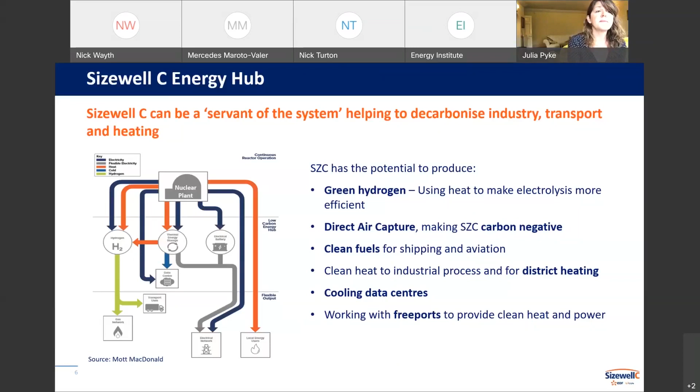We are looking at making hydrogen in the first instance from Sizewell B, and we're going to make that hydrogen for our own use to power hydrogen-powered buses, and as more and more hydrogen-powered construction plant becomes available, that construction plant, so not only lowering the carbon of construction, but also obviously reducing particulate emissions.

But because we're doing that, we are talking to other people in the area around working together so that we can start marrying up greater hydrogen production to the increasing demand profile. So we're talking to local businesses, we're talking to the local councils, and I'll come on to an example about how we're working as part of Freeport East and looking at how to work with the ports to enable the ports to use hydrogen-powered port vehicles, but also starting to look at clean maritime fuel.

And I think the power of a big project which is going to come into an area with a lot of infrastructure being built, when we are looking at installing our own refueling infrastructure, we can work with other people to install refueling infrastructure for more of Suffolk. And we can exercise the power of collective purchasing.

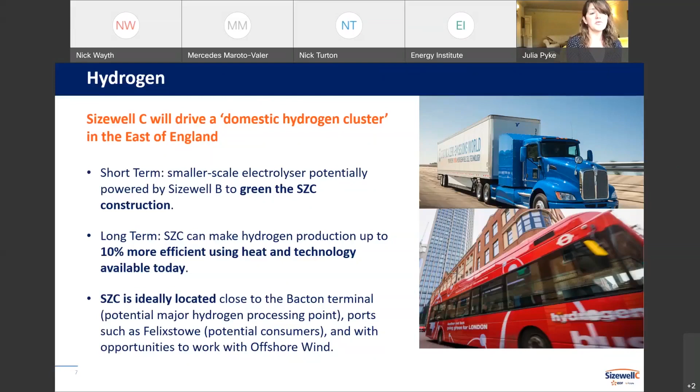So can we go on to my next slide, please?

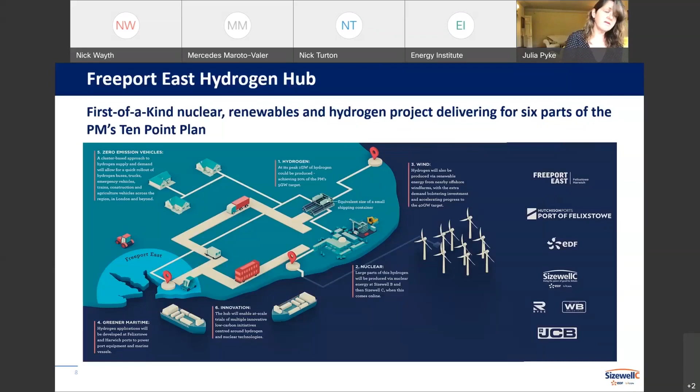So if we can go on to my next slide please, which is direct air capture. We have a great opportunity to make the power station actually carbon negative.

Direct air capture at the moment is a technology which is developing, and we are working with the University of Nottingham, Strata, and Doosan Babcock to develop a technology which, rather than being powered by electricity, would be powered by heat. Remember, the heat from Sizewell C, if we extract 400 megawatt thermal, has minimal impact on electrical output, so the heat is cheap. Using this heat rather than electricity can very significantly lower the cost of direct air capture. So we applied in consortium for funding from the BEIS competition for greenhouse gas removal technologies, and it's a really exciting opportunity to develop.

If we are able to develop a third UK EPR project, this is something which we would look to do at greater scale, and possibly optimize the balance between heat extraction and electricity even further. Even with taking out only 400 megawatt thermal, which doesn't have a significant impact on electrical output, using this direct air capture technology, it would offset or capture the carbon which is put out by the UK's rail industry today. So that is a fantastic opportunity for us.

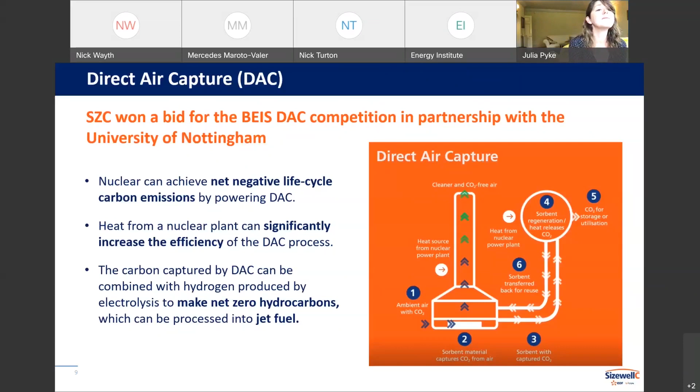So if we go on to the next slide, which is my final slide, if we remember why are we doing all of this? We're doing all of this because we have to achieve net zero, because we have to mitigate climate change, and if possible, look for our technologies to become carbon negative, remembering the net in net zero.

We have produced an engineering route map which analyses the carbon emissions from Leiston and produces an engineered route map to say what is it you can do to actually reduce these emissions to zero. But because this is primarily about people, it operates like Dragon's Den, in which the town council operate as the dragons. We put forward solutions which are to do with insulation, cladding, replacement of heat sources, installation of wind turbines, solar panels, installation of EV charging points. We're looking at hydrogen opportunities, etc.

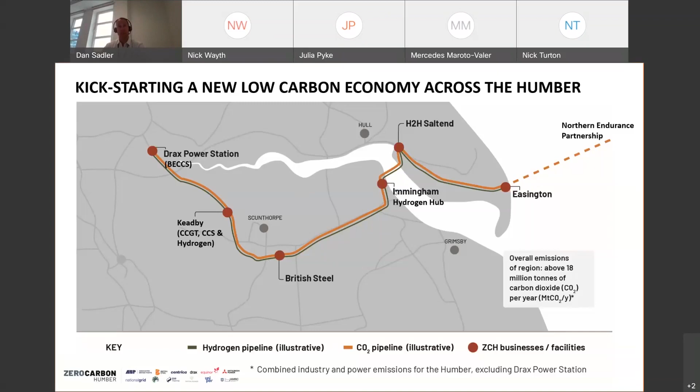So that's the onshore infrastructure, and I'll talk about these projects in a bit because there are multiple projects developing along that infrastructure. But any onshore infrastructure obviously needs to connect to an offshore system in terms of the CO2 transport and storage. So also successful through the Industrial Decarbonisation Challenge was the Northern Endurance Partnership project, which is effectively the offshore element to that onshore infrastructure.

It's quite a unique proposition, a kind of 2-for-1 offer to government, where you've got one storage system facilitating decarbonisation of two critical industrial regions, those being Humber and Teesside. Teesside also has the Net Zero Teesside project, which was in the Industrial Decarbonisation Challenge, but I won't touch on that today in the interest of time.

Importantly, this scheme on its own could meet the Committee on Climate Change recommendations to have 10 million tonnes of carbon stored by 2030, and also its recommendations that at least one region should be substantial production of low carbon hydrogen, and that one in the first instance being the Humber. Now, again, you can see the partnership who are delivering this scheme.

Some of the world's leading companies bringing all that expertise and knowledge to bear to ensure that we can actually deliver this project, and not only deliver this project to decarbonise around 50% of industrial emissions in the UK, but also to really produce that international lighthouse of technologies and share that knowledge across other industrial regions, both in the UK and across the world, to help that decarbonisation transition globally.

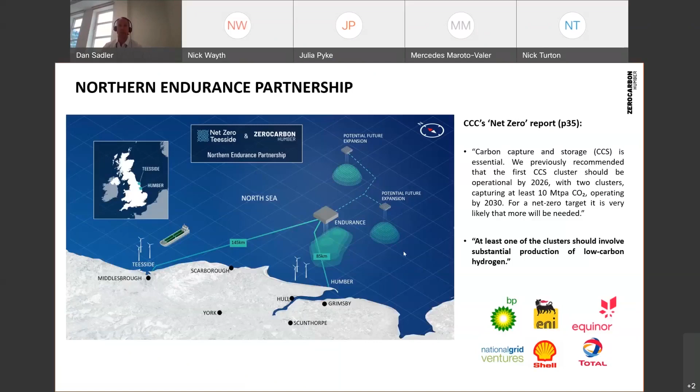So just onto the projects. Salt End, if you remember from that map I showed initially, is the initial anchor project for the Humber infrastructure under the Industrial Decarbonisation Challenge. The Salt End Chemicals Park, to put it into perspective of how big this park is, it emits 3.5 million tonnes of carbon every year. Just to put that into context with the UK industrial clusters, that's more carbon emissions than all of Merseyside or all of Teesside put together. So it's a huge industrial region in its own right, and it's one of the emitter regions within the Humber.

The plan is to build a 600 megawatt autothermal reformer in the first instance, so this is here. The fuel switch, the Triton CHP, which uses Mitsubishi turbines, as well as producing a large low carbon ammonia product for export into the international green products market, and also to support decarbonisation of maritime. We also have the option to blend into the gas networks if that's appropriate at this point, and fuel switching other large industrial users on the site. So really a very integrated low carbon fuel switch solution, and that would reduce emissions in the chemical park by around 1 million tonnes per annum by 2026.

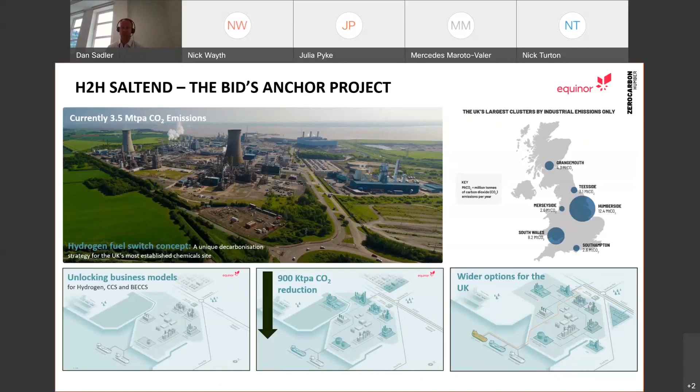Just on to some of the other projects being unlocked as part of this infrastructure. By the way, National Grid Ventures are the lead on the infrastructure development, with us co-developing alongside Equinor.

You've got the Uniper Hydrogen Hub, so if you think just in that Immingham area, Uniper has ambitions to develop a hydrogen hub there, again with blue and green hydrogen, making use of that hydrogen transmission system so that we can link supply and demand in terms of hydrogen demand with credible supply locations. There's 32 hectares of land available there, so they've got very clear strategies and ambitions in that region.

Going across to British Steel, if you come just further inland, British Steel have got a complementary strategy for both carbon capture and storage, as well as hydrogen fuel switching. Steelworks are heavily integrated works with blast furnace technology, a chemical process, as well as use of the off gases in power generation across the steelworks. So they can use a range of technologies based on both CCS and hydrogen fuel switch. By the way, Equinor are working with ThyssenKrupp in Germany to decarbonise Europe's biggest steelworks with 100% hydrogen fuel switch before 2050.

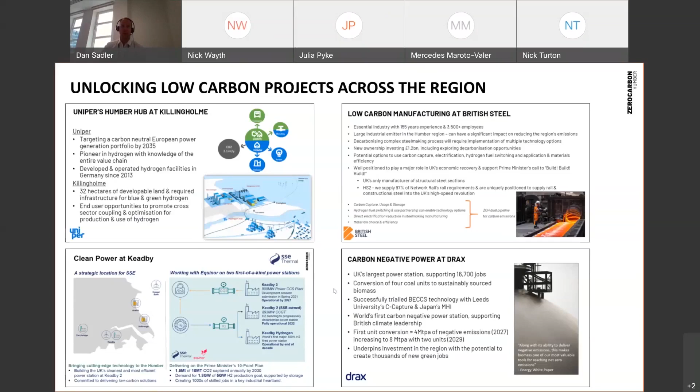The last couple of slides from me - as well as this kind of hotbed of decarbonisation technologies in the Humber, the other thing we're doing as part of the project is working with the AMRC, the Advanced Manufacturing Research Centre, to develop a new Fit for Net Zero programme. That's really dovetailing off the back of the successful Fit for Nuclear programme developed between 2014 and 2020.

The aim of this programme is to look at these new nascent markets, both CCS and hydrogen, and be able to map that to UK supply chain capability, then identify gaps, work with those manufacturers to see if we can improve their manufacture process, or educate them on how to develop their manufacturing process so that the UK supply chain can take maximum advantage of these new markets as they develop.

If you look at the Fit for Nuclear programme, as much as nuclear maybe hasn't taken off as much as we thought, already from that programme they've generated £1.9 billion worth of new contract wins from the work - not necessarily all in nuclear, I hasten to add - and created over 8,000 new jobs. So we're looking to replicate that in these new low carbon markets in these industrial clusters.

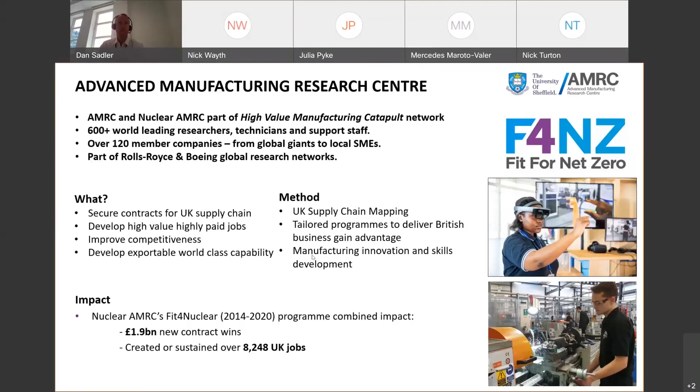The last thing I'd leave you with, there's quite an important process going on at the moment which everybody should be aware of, which is the UK government cluster sequencing process. What they're trying to do is set a natural sequencing for how industrial clusters should be engaged with government in terms of business models to unlock these projects, and produce a commercial framework against which to take a final investment decision. This is actually going on at the moment.

So all the industrial clusters in the UK are competing, or pseudo-competing, into this process. The cluster plans, which are really centred around the infrastructure in the first instance, are due in on the 9th of July. We will know which clusters are track 1 - those will be the first to deploy low carbon infrastructure in the UK in the mid-20s - sometime in August, probably from August the 25th.